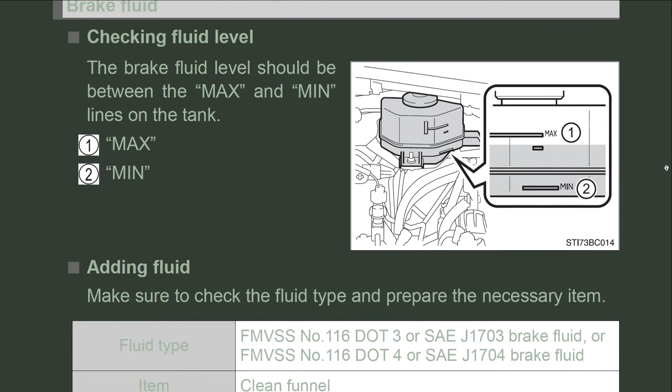Do-it-yourself maintenance: checking fluid level. The brake fluid level should be between the max and min lines on the tank. When adding fluid, make sure to check the fluid type and prepare the necessary items.

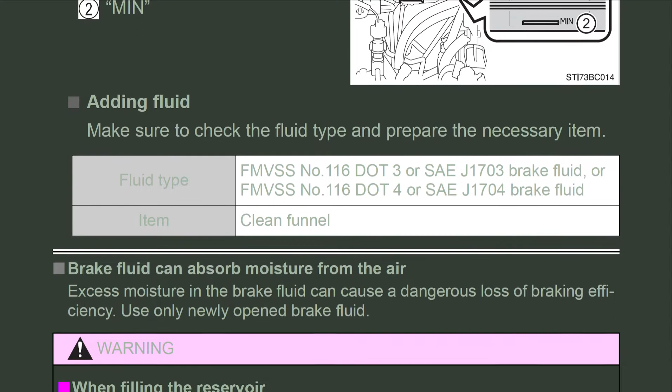Fluid type: FMVSS number 116 DOT3 or SAE J1703 brake fluid, or FMVSS number 116 DOT4 or SAE J1704 brake fluid. Item needed: a clean funnel.

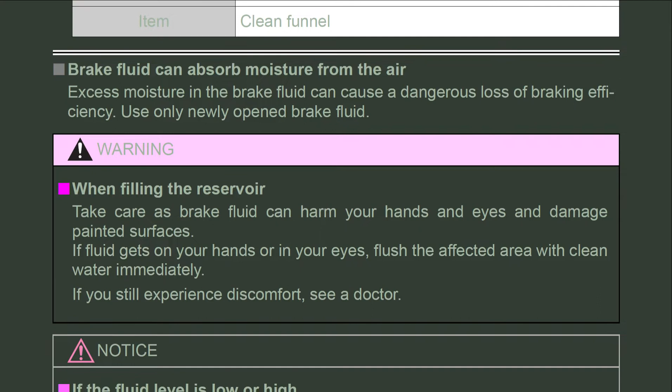Brake fluid can absorb moisture from the air. Excess moisture in the brake fluid can cause a dangerous loss of braking efficiency. Use only newly opened brake fluid.

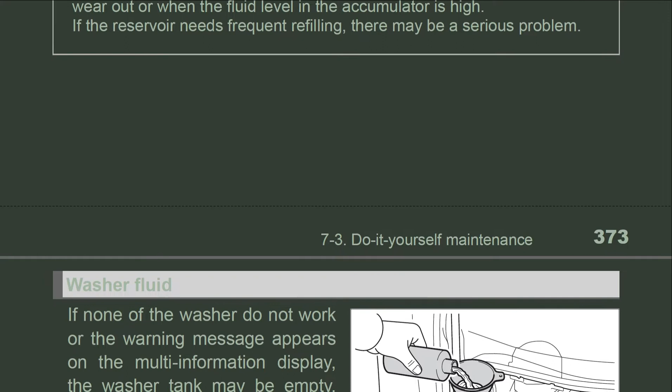If the washer does not work, or the warning message appears on the multi-information display, the washer tank may be empty. Add washer fluid.

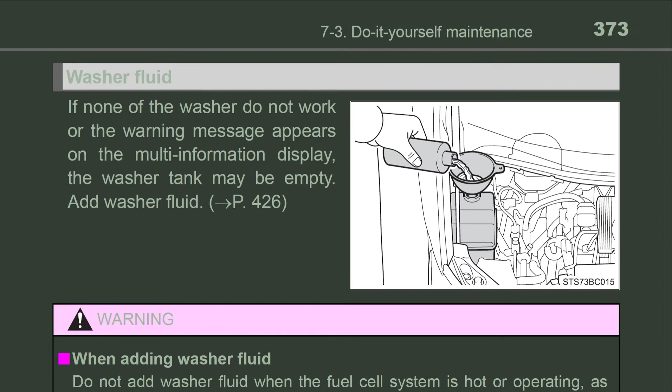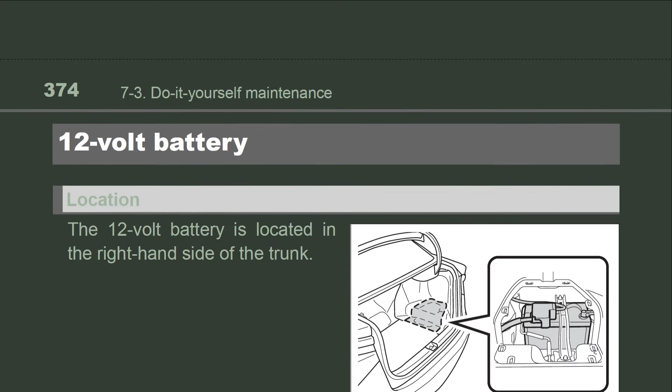The 12-volt battery is located on the right-hand side of the trunk. Remove the 12-volt battery cover. Make sure that the 12-volt battery terminals are not corroded and that there are no loose connections, cracks, or loose clamps, including the terminals and hold-down clamp.

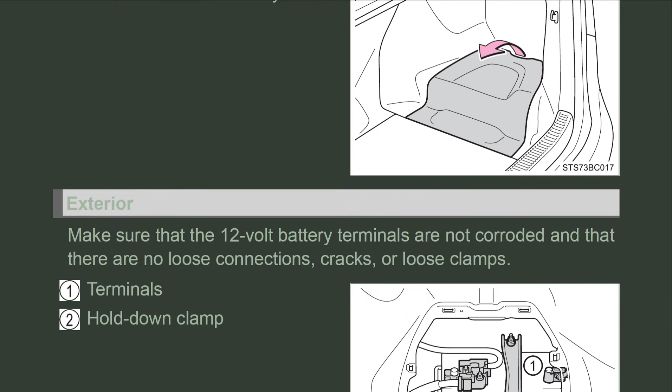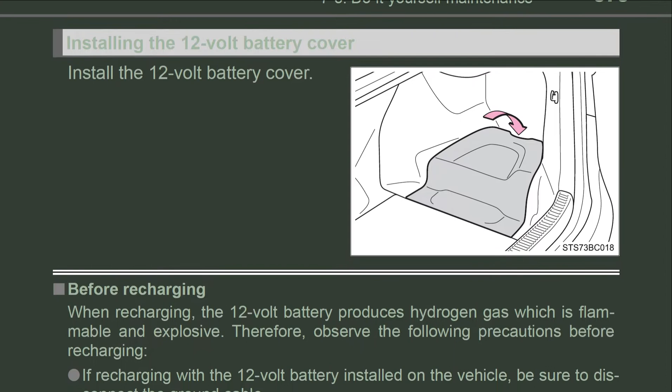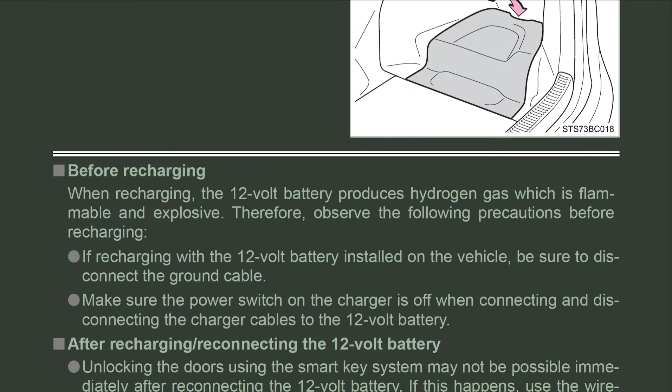Install the 12-volt battery cover. Before recharging: when recharging, the 12-volt battery produces hydrogen gas, which is flammable and explosive.

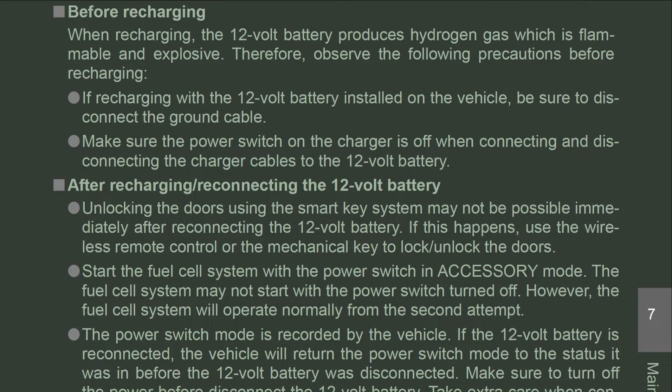Therefore, observe the following precautions before recharging. If recharging with the 12-volt battery installed on the vehicle, be sure to disconnect the ground cable. Make sure the power switch on the charger is off when connecting and disconnecting the charger cables to the 12-volt battery.

After recharging or reconnecting the 12-volt battery, unlocking the doors using the smart key system may not be possible immediately after reconnecting. If this happens, use the wireless remote control or the mechanical key to lock or unlock the doors.

Start the fuel cell system with the power switch in accessory mode. The fuel cell system may not start with the power switch turned off; however, it will operate normally from the second attempt.

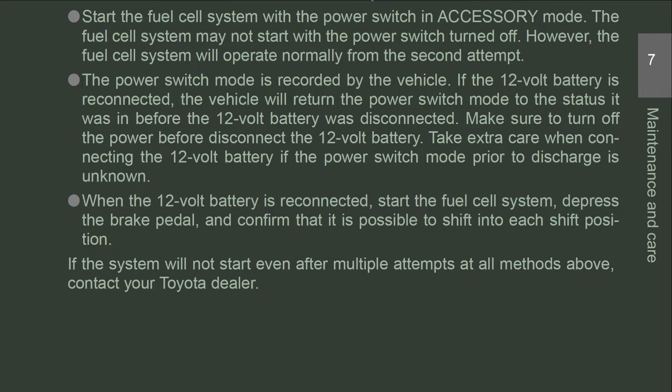The power switch mode is recorded by the vehicle. If the 12-volt battery is reconnected, the vehicle will return the power switch mode to the status it was in before the 12-volt battery was disconnected.

Make sure to turn off the power before disconnecting the 12-volt battery. Take extra care when connecting the 12-volt battery if the power switch mode prior to discharge is unknown.

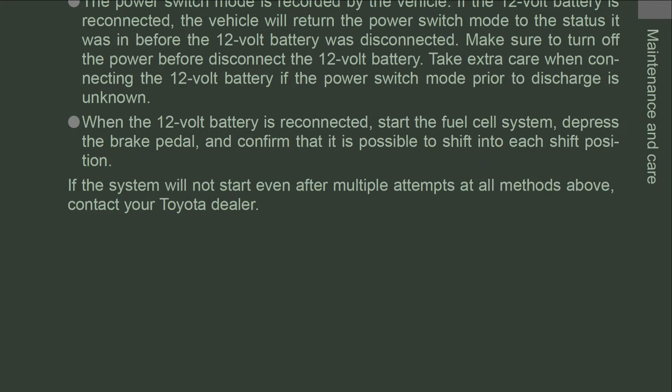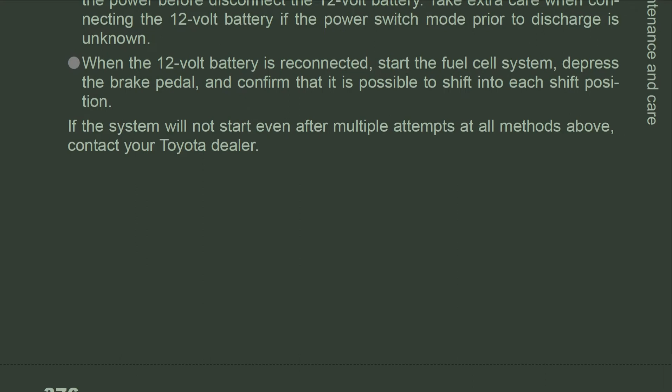When the 12-volt battery is reconnected, start the fuel cell system, depress the brake pedal, and confirm that it is possible to shift into each shift position. If the system will not start even after multiple attempts at all methods above, contact your Toyota dealer.

Warning: chemicals in the 12-volt battery. The 12-volt battery contains poisonous and corrosive sulfuric acid and may produce hydrogen gas, which is flammable and explosive. To reduce the risk of death or serious injury, take the following precautions while working on or near the 12-volt battery.

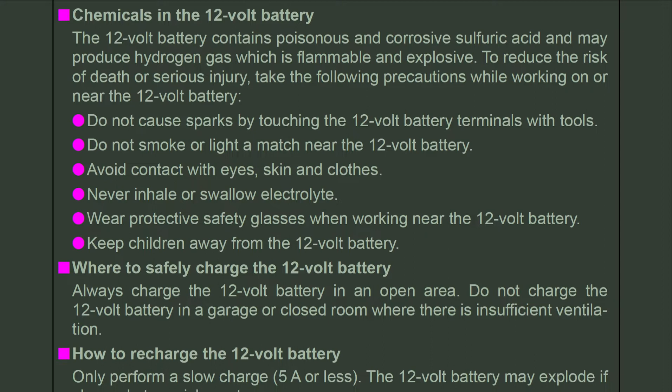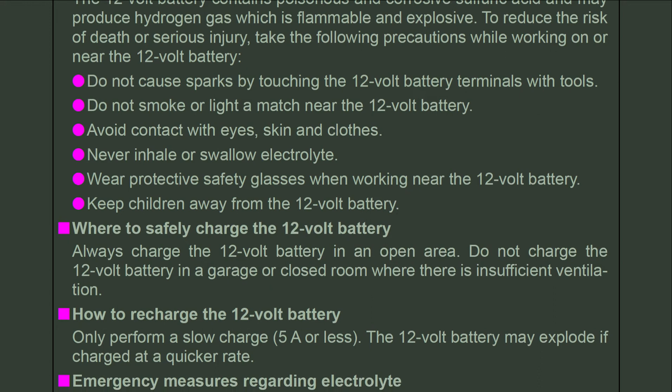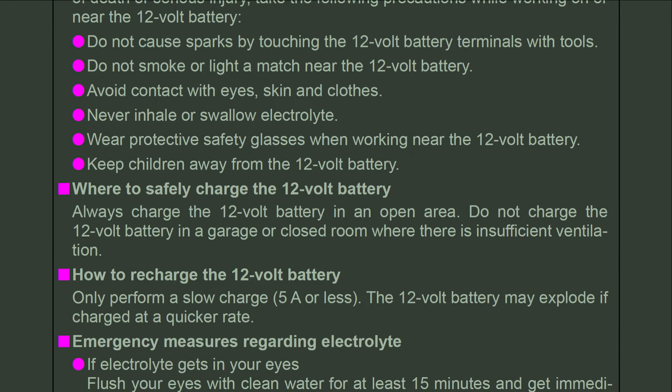Do not cause sparks by touching the 12-volt battery terminals with tools. Do not smoke or light a match near the battery. Avoid contact with eyes, skin, and clothes. Never inhale or swallow electrolyte. Wear protective safety glasses when working near the 12-volt battery. Keep children away from the battery.

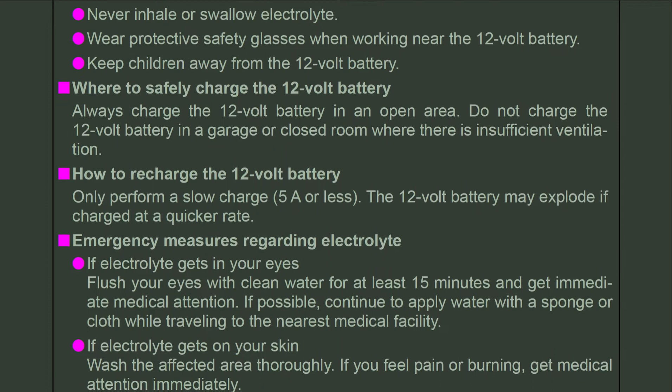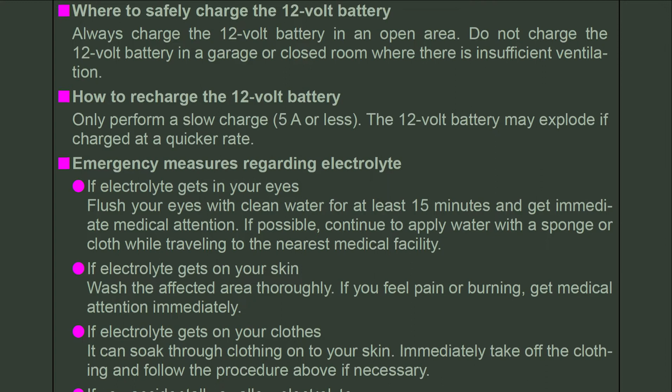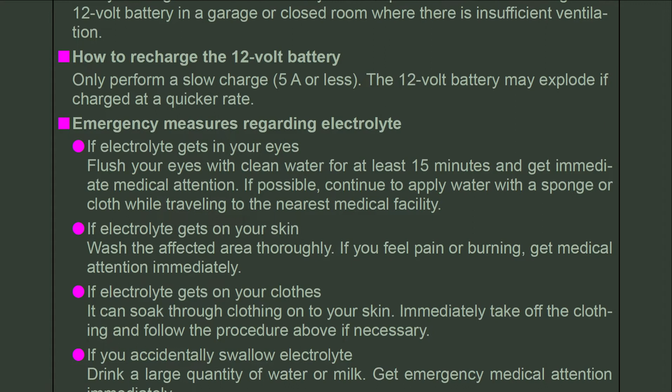Always charge the 12-volt battery in an open area. Do not charge it in a garage or closed room with insufficient ventilation. Only perform a slow charge at 5 A or less; the battery may explode if charged at a quicker rate.

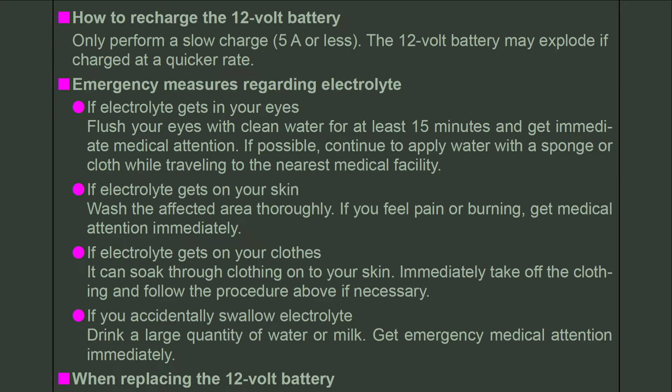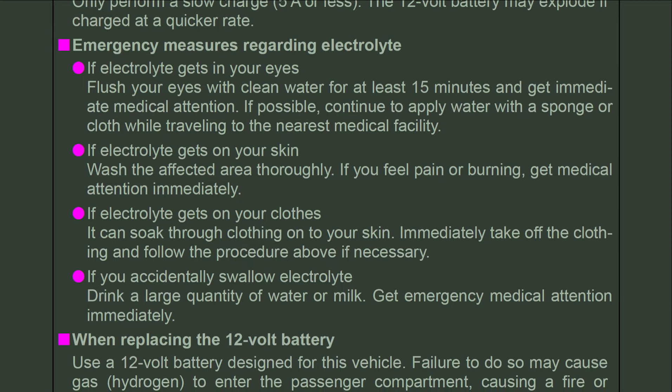Emergency measures regarding electrolyte: if electrolyte gets in your eyes, flush your eyes with clean water for at least 15 minutes and get immediate medical attention. If possible, continue to apply water with a sponge or cloth while traveling to the nearest medical facility.

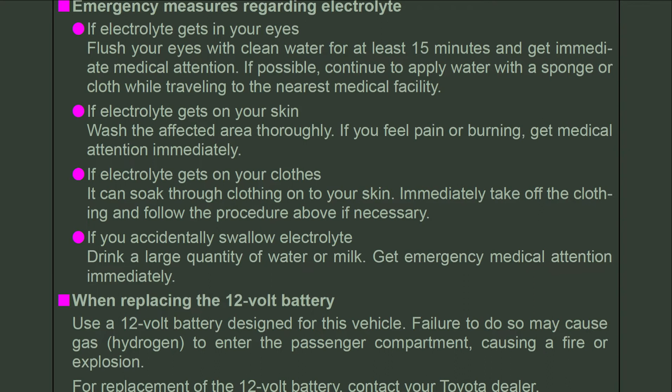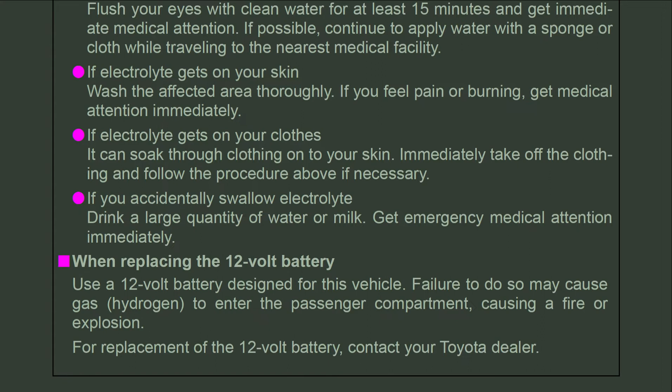If electrolyte gets on your skin, wash the affected area thoroughly; if you feel pain or burning, get medical attention immediately. If electrolyte gets on your clothes, it can soak through onto your skin. Immediately take off the clothing and follow the procedure above if necessary.

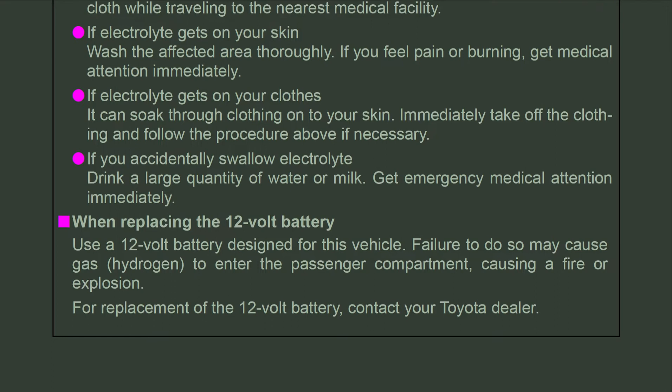If you accidentally swallow electrolyte, drink a large quantity of water or milk and get emergency medical attention immediately.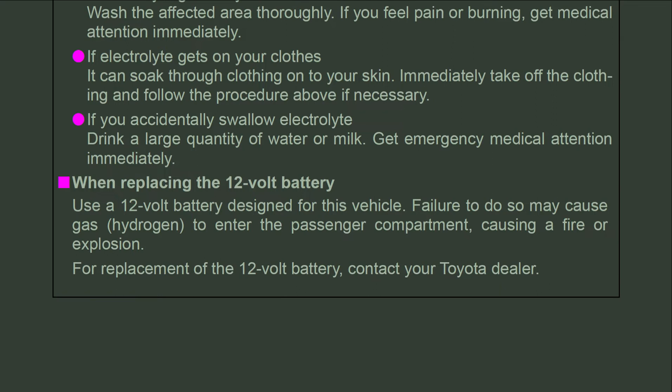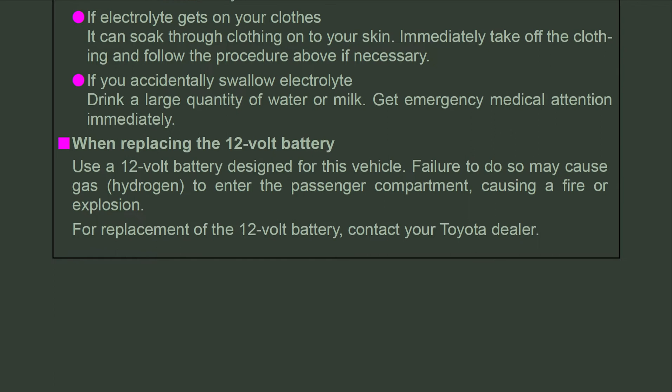When replacing the 12-volt battery, use a battery designed for this vehicle. Failure to do so may cause hydrogen gas to enter the passenger compartment, causing a fire or explosion. For replacement of the 12-volt battery, contact your Toyota dealer.

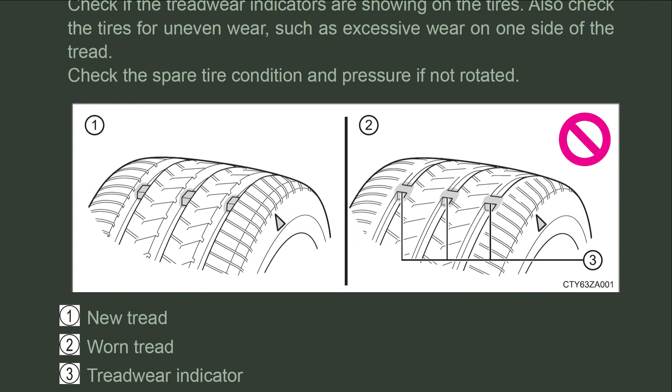Check if the tread wear indicators are showing on the tires. Also check the tires for uneven wear, such as excessive wear on one side of the tread. Check the spare tire condition and pressure if it has not been rotated.

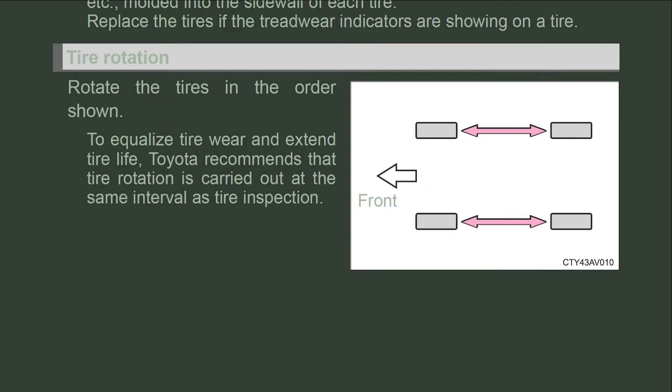New tread versus worn tread, and the tread wear indicator. The location of tread wear indicators is shown by a TWI mark or similar, molded into the sidewall of each tire. Replace the tires if the tread wear indicators are showing.

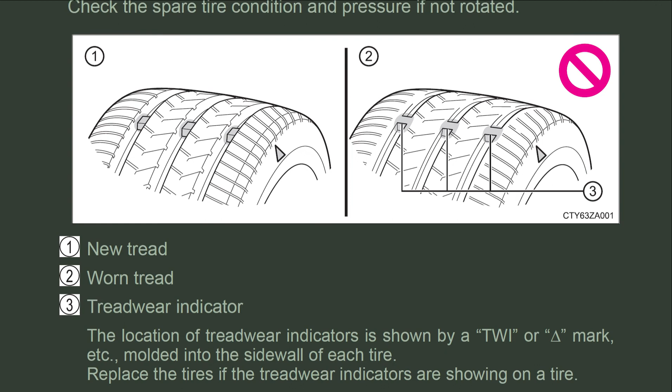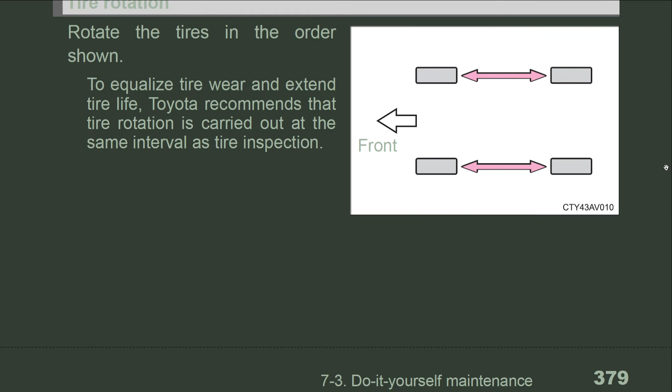Rotate the tires in the order shown. To equalize tire wear and extend tire life, Toyota recommends that tire rotation be carried out at the same interval as tire inspection.

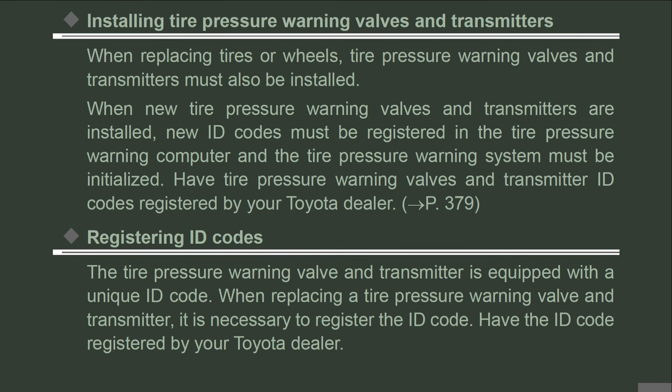Installing tire pressure warning valves and transmitters: when replacing tires or wheels, these components must also be installed. When new valves and transmitters are installed, new ID codes must be registered in the tire pressure warning computer and the system must be initialized. Have the ID codes registered by your Toyota dealer.

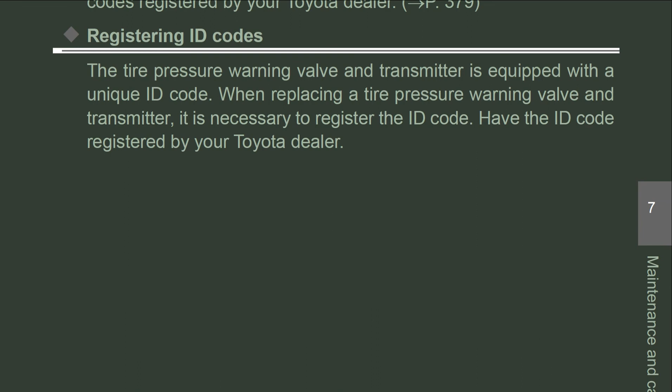Registering ID codes: the tire pressure warning valve and transmitter is equipped with a unique ID code. When replacing a tire pressure warning valve and transmitter, it is necessary to register the ID code. Have the ID code registered by your Toyota dealer.